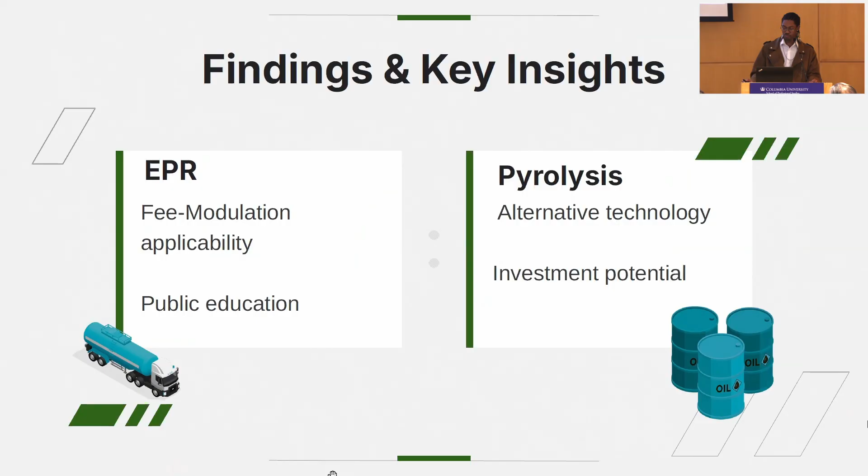Now, proceeding to our technological processes. What is pyrolysis? Well, pyrolysis is the major technology we are evaluating besides mechanical recycling. Pyrolysis is a process in which plastics are heated in the absence of oxygen. The primary outputs are oils that are used or sold commercially. Due to this circular aspect, our clients have assured us that pyrolysis could indeed contribute to their 40% recycling goal.

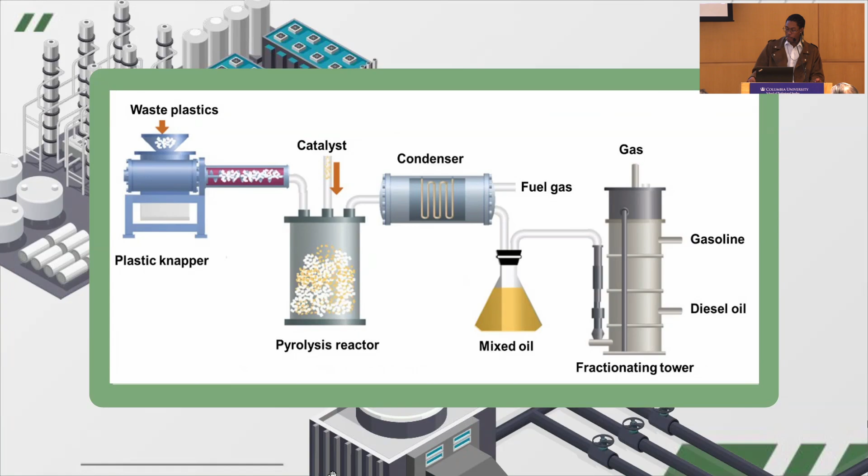One of pyrolysis' key advantages is that it can process mixed or contaminated plastics that are difficult to recycle mechanically. Although the oils yielded through plastic pyrolysis do produce greenhouse gases when burned as fuels, our research found that these fuels are typically utilized in hard-to-electrify industrial processes, where virgin fossil fuels would otherwise be used. Another use for these oils is as a hydrocarbon petrochemical feedstock, making it especially relevant to our clients.

Our model performs a high-level techno-economic assessment to evaluate the environmental and economic impacts of different plastic waste solution scenarios. We intend for our clients to utilize the model as follows. First, the clients will input plastic waste volume projections into the model and distribute the volume over different tech solutions on a percentage basis. The solutions modeled include mechanical recycling and pyrolysis, as well as landfilling and incineration to make comparisons from a baseline. The clients can build up 4 different solution scenarios in this way, each with different ratios of plastic waste going to recycling, pyrolysis, landfills, and incineration.

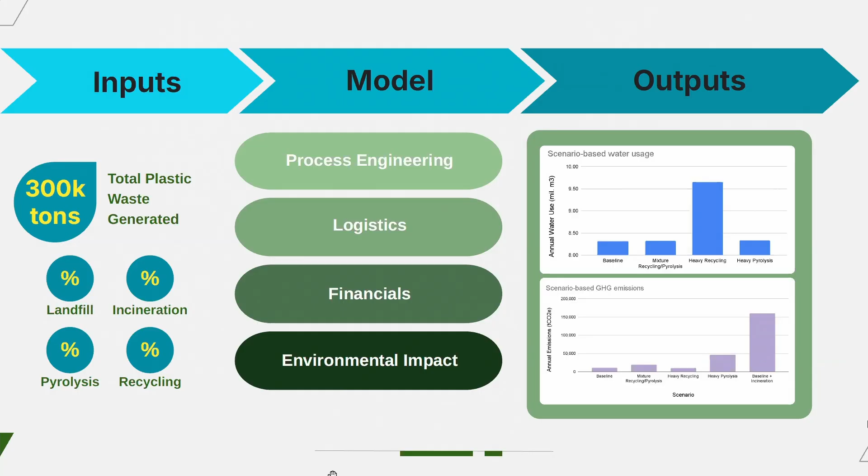Then the model can do its work. Through our data collection, we were able to incorporate logistical, process engineering, financial, and environmental metrics supporting the different solutions. The 4 pillars of the model feed into our outputs. These results are from sample scenarios that we have constructed to illustrate how our clients may view the results of their own inputs. Here, we clearly observe the 4 different plastic waste scenarios that we constructed for comparison.

As visualized in the baseline scenario, roughly 300,000 tons of plastic waste are generated annually, with about a 22% recycling rate. The following scenarios represent an increase in non-landfill plastic waste management to 40% of the total plastic waste, with different ratios of pyrolysis and recycling making up the difference.

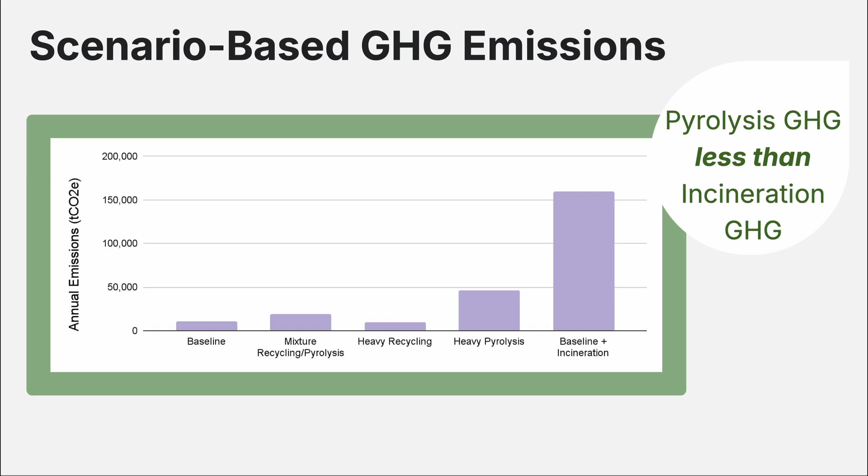Here, we have our scenario-based greenhouse gas emissions. There is a heavier process emission factor associated with pyrolysis than traditional recycling. But when compared to the projected emissions when conventional plastic incineration is employed to reach the 40% goal, there is a clear environmental benefit to pursuing pyrolysis as an alternative solution, saving roughly 100,000 tons of emissions per year.

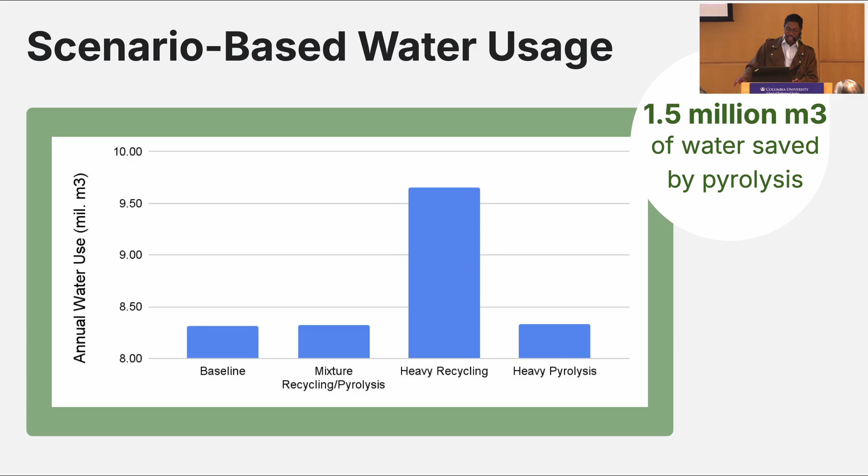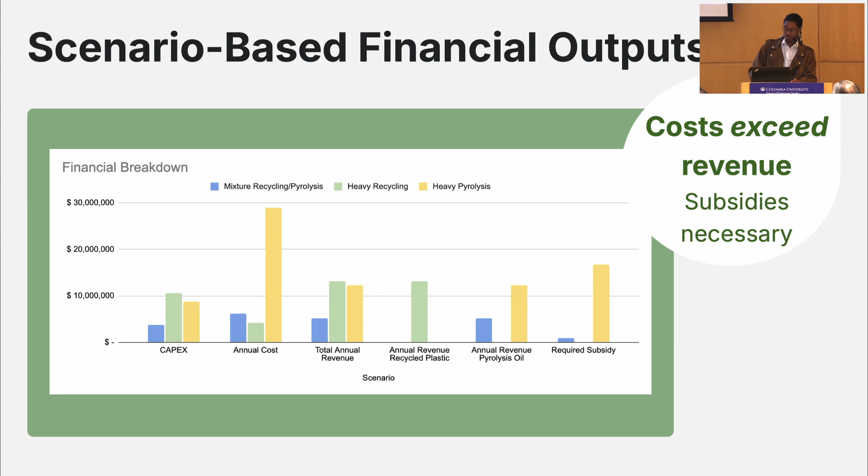We have built this model with client independence in mind. Because the inputs are fully customizable, you can adapt the tool for various future scenarios yourself. This is not just a one-time fix. It is a dynamic tool designed to scale with the clients. As you can see, when you change your plastic waste inputs, our outputs will change with them.

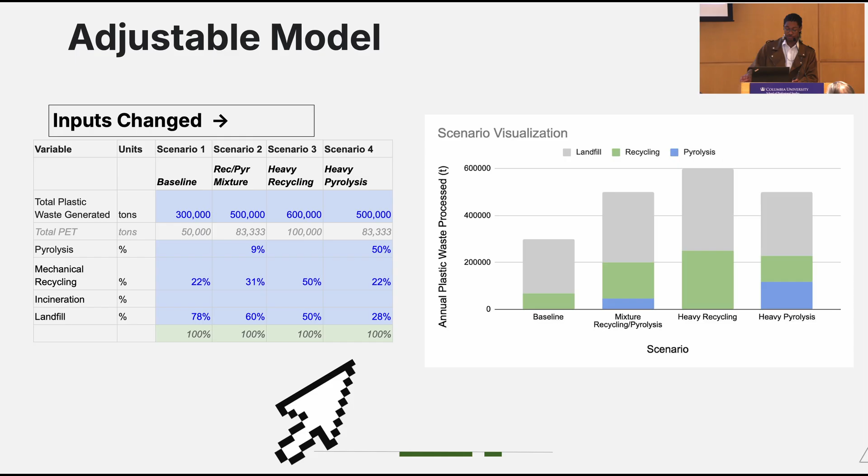While this project has been rewarding, it has not been without its challenges. Broadly, we had to narrow the scope of our mission to a countrywide infrastructural problem while balancing the competitive priorities of various stakeholders and navigating language barriers. From a policy standpoint, we dealt with highly variable EPR frameworks that made a one-size-fits-all implementation difficult.

Challenges regarding model development include pyrolysis being a novel, at-scale plastic waste solution. We struggled to find the resources for a baseline scenario, so we settled on a 22% recycling rate, with the remainder going to landfills. The goal of the model is to be comprehensive, but not to constrain scenario construction.

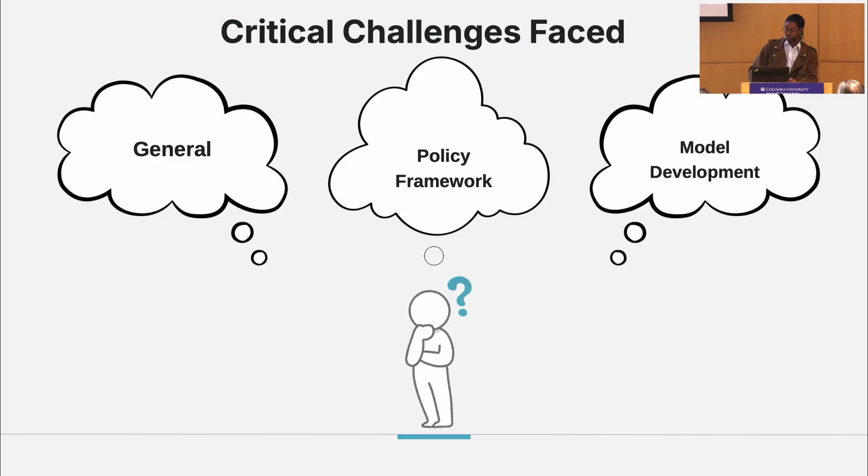Our project established a baseline framework for our clients to evaluate waste management while accounting for future petrochemical industry growth. Additionally, stakeholder familiarity is critical. Aspects like public acceptance of new infrastructure and private investment levels should shape realistic implementation of scenarios. Our goal is also to include environmental concerns such as particulate matter 2.5, volatile organic compounds, and heavy metals in a detailed environmental analysis.

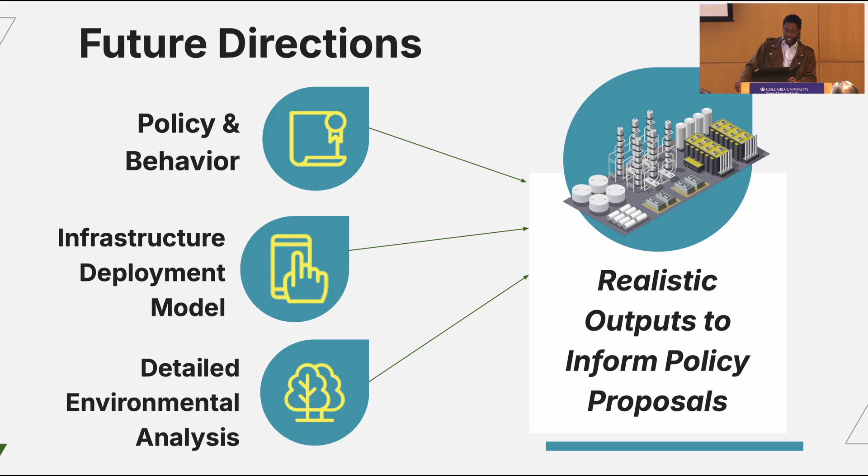While no waste management system is without risk, pyrolysis presents a significant net reduction in impacts compared to a 40% system that uses incineration. With proper emissions controls and monitoring to address concerns such as PM 2.5, VOCs, and heavy metals, pyrolysis and our waste management systems can provide a more sustainable and lower impact long-term solution.

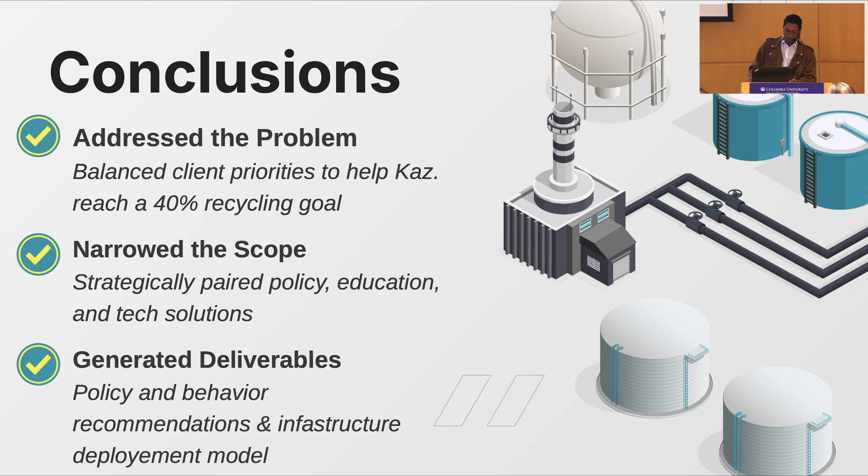In conclusion, our team worked to take a countrywide plastic waste problem and provide a solution that narrowed our scope to focus on strategically paired policy, educational, and technological solutions, which led to developing a model our clients could use to project the financial, operational, and environmental implications of meeting their 40% recycling goal. Finally, we developed short-term recommendations to further optimize plastic waste collection systems.

Thank you. Great presentation overall. Just a quick question on targeting communities that already have significant incineration infrastructure, just for the comparative benefit that you highlighted for GHG. Could you maybe speak a little bit to the policy implications of taking away from that workforce? Like the workforce that's already working at the incineration facility, maybe being able to retrain them to work for the pyrolysis facility, what that might look like, similar to the transition we're seeing for a lot of renewable electrification infrastructure from coal, natural gas, different things like that.

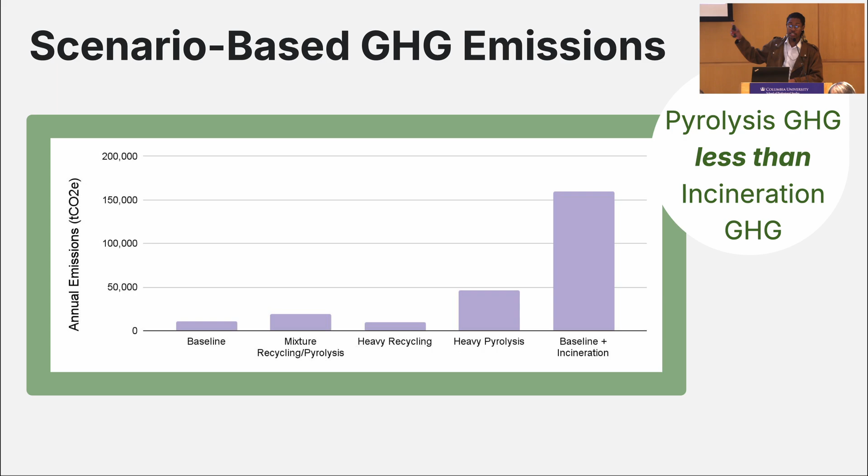Yes. So I must clarify, part of the reason we included incineration in regards to our greenhouse gas emissions is that Kazakhstan does not necessarily have the incineration infrastructure that is represented here, but this is to visualize, if they were to incinerate to meet their 40% recycling goals, these are the emissions we would be seeing, and this is to compare to our heavy pyrolysis and recycling mixtures.

Hello? Oh, pyrolysis is like the big deal. Just FYI, didn't you say? Yeah. We're tracking it, yeah.

So they're landfilling the rest of it, right? Yes, ma'am. There's a National Academies study about using plastics in asphalt. It can go into other things, not combs or plastic seats, but actual infrastructure. It's a National Academy study. Maybe you should look at that, because it takes large volumes, and I don't know what their roads are like, but it can go into the asphalt, okay?

That sounds good. Yeah, but pyrolysis is, like, that's the future. We're with it. Thank you. Great presentation, great way to handle the technical breakdown, by the way. Isn't it awesome to know that you're working on this huge project of the future, pyrolysis?

But what I'm curious about, I actually have two brief questions. Number one, is this dependent on people recycling, or are the companies that are creating the plastic going to also have a hand in doing the recycling? Because when it's just left up to consumers, that just lets the organizations go scot-free.